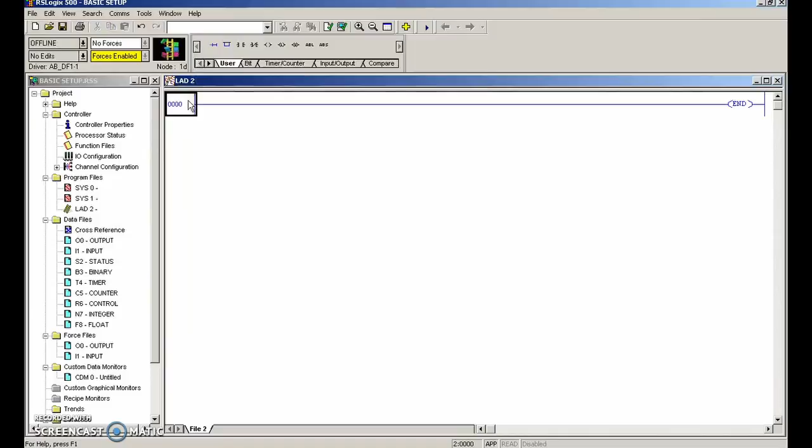Okay, so now we're going to do the closed loop for the forward reverse. So let's drop in a rung. And remember that each of these guys for the forward and the reverse are going to be carbon copies of each other. So once we do one of them for the forward, we'll wait for a little bit to put in our addressing, and then we can copy and paste for the reverse. So for this guy, our stop push button is an XIC, which we've already gone through in the previous video in the playlist.

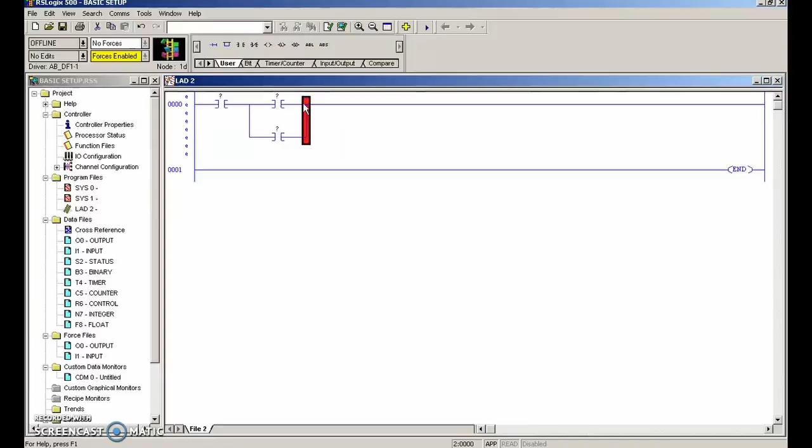Then we've got the forward push button. Then in parallel with that forward push button, we have our holding contact. And again, as I'm doing this, it means nothing to you if you don't have the diagram from the previous video in front of you, right? So here's our stop, here's our forward, here's our holding contact. I would bring up your diagram from the previous video so you can keep track of the circuit as I bring it in here. Okay, then we'll drop in our electrical interlocks.

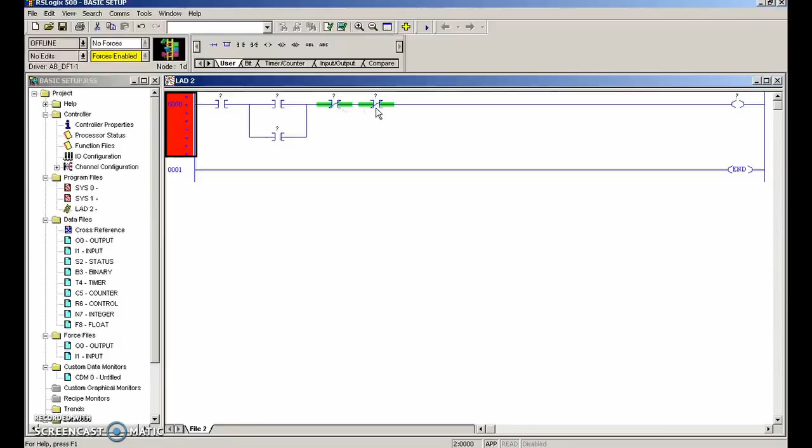Then we said we're going to have our overload as well, and then finally we're going to have our output. You want to make sure that you don't have any inputs on the right side of the output. This is the last thing to go into the rung. Okay, so we have stop, forward, holding contact, electrical interlock, and overload, looks good. So we will copy this guy and paste it in. Beautiful. So now we've got identical rungs for the forward and the reverse.

And on our inputs here, we'll bring in our holding contacts. So let's see if these are still the same. Okay, so there's our stop. So we can grab that and bring it up until we see green. Looks good. Okay, then we've got our forward push button, normally open. We'll drop that here. Then we've got our reverse push button, normally open. Looks good. And then we have to put in our output.

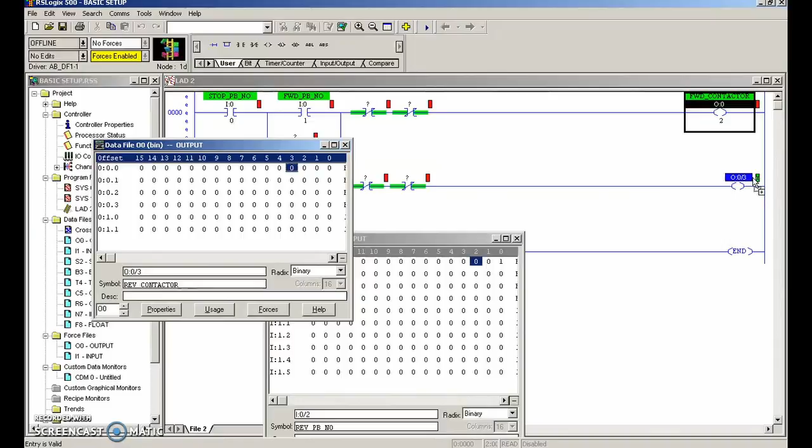So open up our output data table. And I had my forward contactor on output number 2. And I had my reverse contactor on output number 3. And those are the only places we're going to make use of the outputs. How do you get back to your main program now? Hang on, just 2 seconds. So we're going to make use of some inputs for our holding contacts and for the overload.

So let's take a look at where we've wired in the forward and the reverse holding contacts. Off of my I/O table that I have in front of me, I have my input number 5 as my forward holding contact. You know what, I'll just do HC. And for number 6, I've got that as my reverse holding contact. Beautiful. And where's my overload? My overload, normally open, is wired up to input number 7. So this is my overload, and that's my normally open contact on the overload. Looks good. So let's put the overload as the last thing in the rung here.

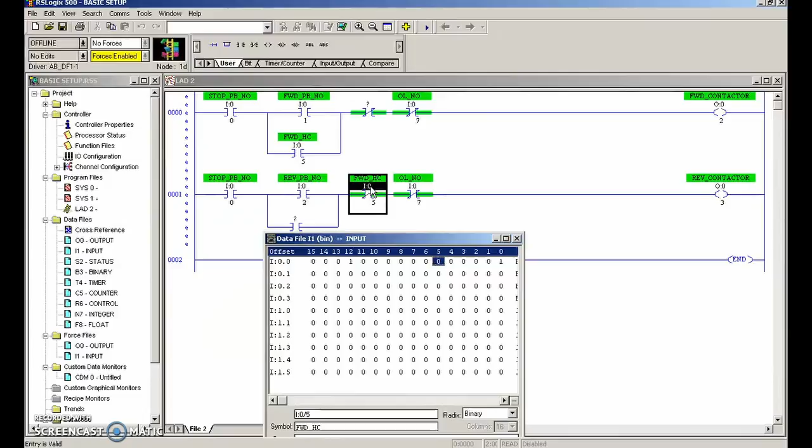And then we're going to make use of the forward holding contact, and it's going to go right there. And it's also going to go in line with the opposing contactor. So this will be our electrical interlock for our reverse contactor, so that this guy can't turn on if the forward is already on. And then our reverse holding contact is going to go here, and we're going to make use of that guy numerous times, but just with the opposing instruction. So we're saying that when the reverse is off, allow the forward to turn on.

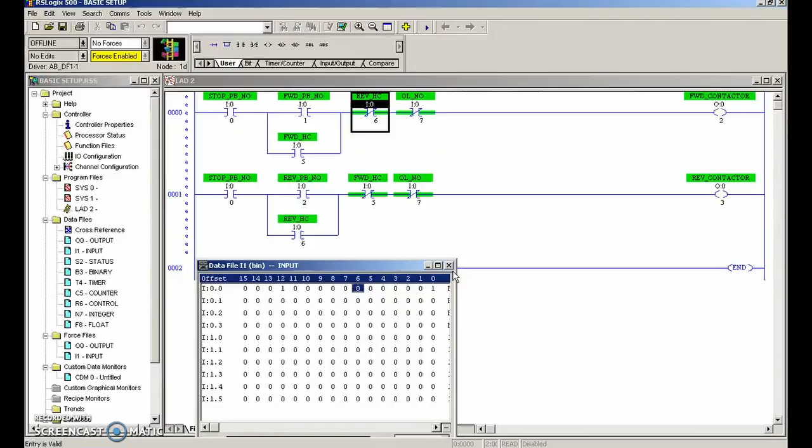And down here, we're saying that when the reverse has turned on, we're actually looking at that holding contact pulling in and providing us with that signal. So this will give us that rear view mirror effect in that we can turn on the contactor, but we can also see that that actual contact has made and pulled in. So that if it hasn't pulled in, the contactor won't be held in. Beautiful. So that'll provide us with our closed loop now, guys.

Okay, so let's check this program to see if there's any issues. So we'll go here to verify the project. Looks good. No errors found. Beautiful. Okay, so let's download this to our PLC now.

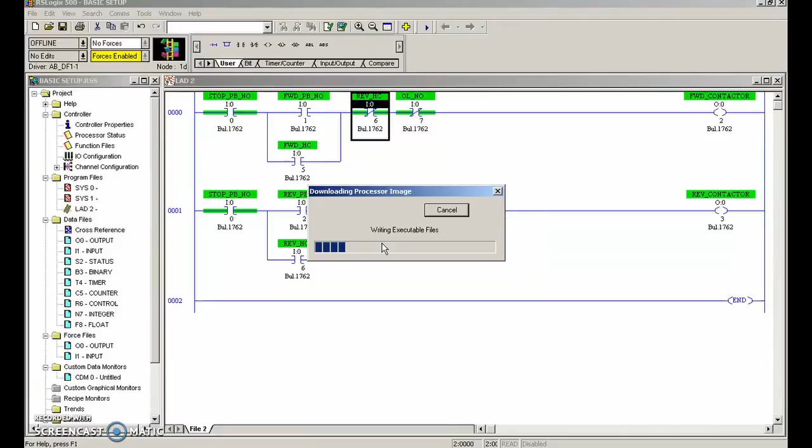Looks good. Okay, let's make sure that everything's working first, and then we'll do a picture-in-picture. So stop push button is coming in. Forward is turning on, and when I let go, it actually stays on. Beautiful. And then the reverse is pulling in. When I let go, that holding contact is making and sending that signal in.

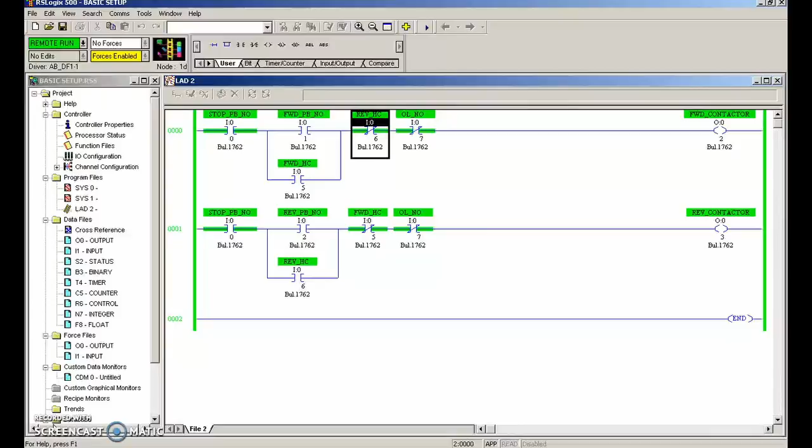Beautiful. Okay, let me pause here, and we'll do two separate picture-in-pictures. So first, we'll do a picture-in-picture with the contactor to show you it changing state as the PLC program changes state, and then I'll show you the LEDs on the PLC as well.

Alright guys, so let's take a look at the contactors and see them pull in as we change our PLC program. So we've got the stop push button, and you can see that that is changing state on both of the rungs. When I hit the forward push button, you can see that we have logic continuity right across. So remember, it's no longer the path of current, it's the path of logic. Each of these guys, the stop, the reverse, holding contact, and the overload, and the push button, they've all been brought into separate inputs. Input 0, input 1, input 6, and input 7.

Okay, we're also looking at the forward holding contact. So we've made use of this normally open contact right here, and we've brought power to it, and off of the bottom there, we're going to, let's see, input number 5. So when this actually pulls in, then you can see that the contactor turns on, right? So let me just turn that off for now. So once we hit that forward push button, then it'll turn on that contactor, and we'll have a signal coming in to the PLC that it's actually turned on.

So hitting the forward push button now, and you can see we're going in the forward direction. Okay, once I let that push button go, it stays held in, and this holding contact now has 24 volts going to the PLC. And this is looking out in the field to make sure that that contactor has actually pulled in. If that contactor was on fire or not working or smoked from something that happened, then we'd be able to see that, as opposed to the open loop where we were just looking at the data table inside the PLC.

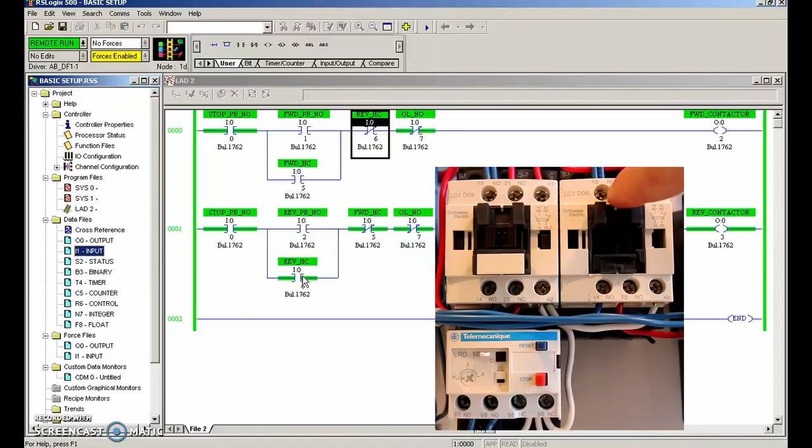Okay, I'm now going to hit the reverse push button, and we'll see that our holding contact pulls in the reverse as well. So input number 6 should pull in. And again, that's wired here where we have 24 volts to the top. Off of the bottom, we're going to our PLC to physically look to see that that reverse contactor has pulled in. Okay, so that's one way that we're providing with the closed loop. We're actually looking to see whether that contactor has pulled in by monitoring the actual holding contacts on the contactor.

Okay, we've also made use of the overload. On the overload on this side here, with 95 and 96, we have our AC in series with our coil. So this conductor goes from A2 through the normally closed and then back to the transformer. On the 97 and 98, the normally open, we have DC. So here we have 24 volts AC, here we have 24 volts DC.

And if I trip the overload by opening up this window and then moving that test button to the side, you'll see that this is no longer true, and it will actually turn off, or sorry, we have the reverse on, this will no longer be true, and it will turn off my reverse contactor. So we'll trip the overload, which physically stops or interrupts the AC current going to the coil, but also interrupts the logic continuity on my PLC program.

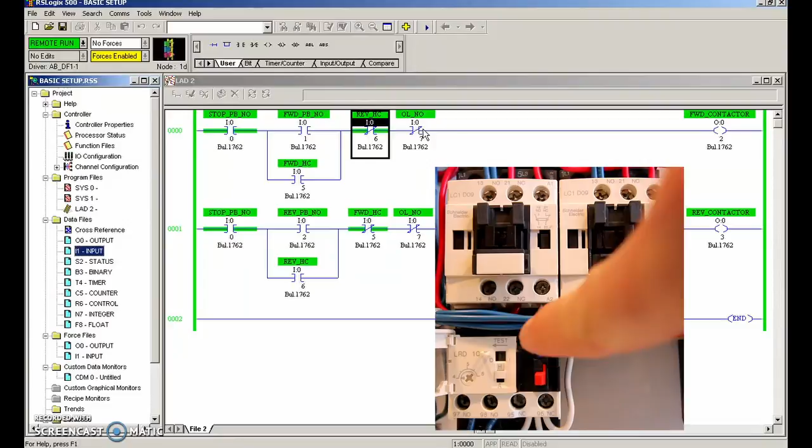So now if I try and hit the forward push button, nothing happens because that overload is not true right now. There's not 24 volts going to that input. And if I hit the reverse, nothing happens as well. On the previous video, when I reset that overload, the contactor turned right back on. But you can see now I can reset the overload, and it's a lot safer. The machine hasn't turned right back on. It's waiting for me to hit either the forward or the reverse.

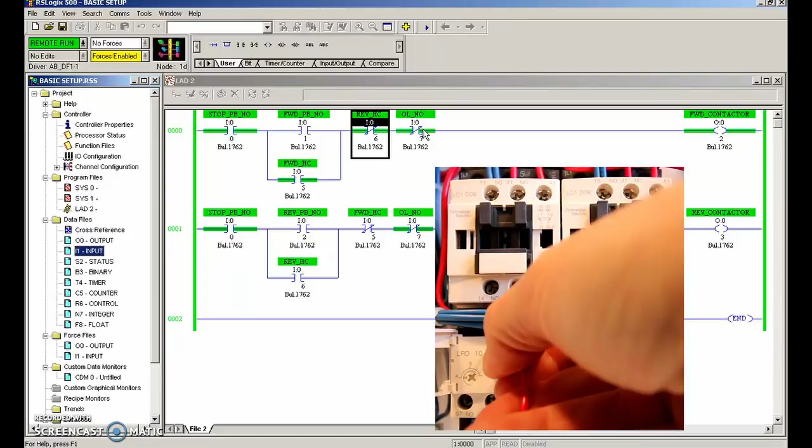And just to show you in the forward that if we trip that same overload here, so again with this window you just have to grab it on the side and just push it over just with a control screwdriver.

I'm just using a spare piece of wire here, and you can see that that kicks out our coil and stops the forward contactor from turning on. Again, if I reset that overload, then my contactor does not fire back up. Beautiful. All right, guys, let's stop there, and then we'll bring in the PLC, and you'll see the LEDs firing on for each of these guys.

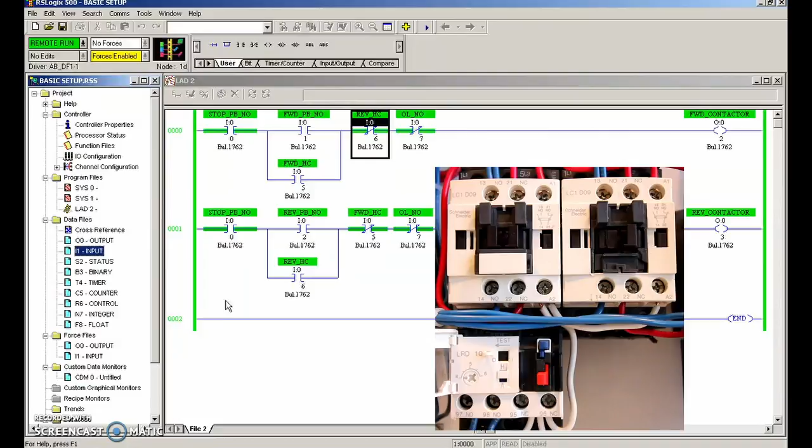All right, so just to finish up, we're looking at the PLC now. This is my stop push button here, so you can see that changing real time on the screen, and you can see that first LED turning on. My forward input is on input number 1, so as I press that push button, then input number 1 is going to fire on. But you're also going to find that input number 5 fires on as well, because that's my holding contact. There we go. You can see both of those LEDs on.

When I let go of my forward push button, then number 1 goes out. You can see that number 5 is still pulled in, showing me that I still have the forward contactor pulling in. So this provides me with that closed loop in that I'm actually looking out in the field to see that that coil has actually pulled in. If that coil was on fire, then the holding contact would never pull in because that coil would never be energized. Okay, let's take a look at the overload as well.

If I trip the overload, then you'll see that number 7, let's see, number 7 is coming in. Sorry, slip of the tongue there, guys. Number 7 is not coming in because we're examining that there's no voltage there. So as long as there's no voltage coming in from the overload, then that forward contactor will still stay on. So when I trip the overload, then it will send a signal into the PLC.

So you'll see that when I trip the overload that the forward contactor goes out, my holding contact is no longer true, so number 5 will go out, and you'll find that number 7 is illuminated, showing us that we are actually in an overload state. There we go. So 5 went out, 7 is now illuminated, showing us that we're in an overload state, and the contactor has pulled out.

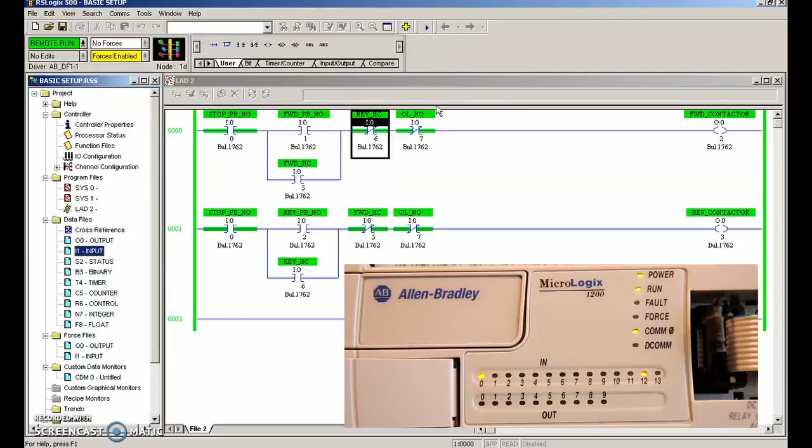When I reset that overload, you'll find that number 7 is extinguished. This is then true because we're looking for no voltage, and at that point there is no voltage on input number 7, and allows us to go in the forward direction again. Beautiful. In the reverse direction, when I hit the reverse push button, input number 2 will be illuminated, and when the reverse contactor pulls in, then number 6 will be illuminated as well.

Okay, so you can see that they basically happen at the same time. So there's my reverse push button being pressed. I no longer need it being pressed because this is turned on. My reverse holding contact is pulled in, and I have the signal coming in from that reverse contactor to say that it's on. Again, if I trip the overload, then my number 6 will go out, right? So 6 is the holding contact for the reverse, and 7 will come in. So number 7 will illuminate because that overload has now sent a 24 volt signal in.

So here's the overload being tripped. There you go. So you can see that the reverse contactor has pulled out. This is actually physically looking at the reverse contactor. So it is no longer illuminated because we no longer have 24 volts to 6. But on the overload, we now have 24 volts going into that input. We're looking for the presence of no voltage. Right now there is voltage, so that allows us to stop that continuity.